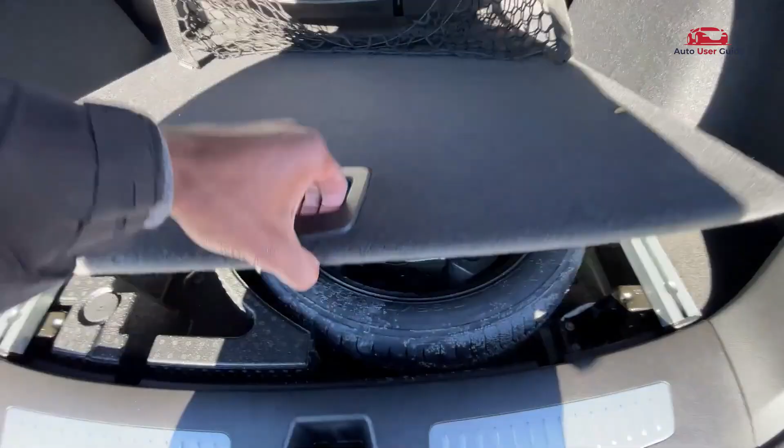Engine Compartment Fuse Box.

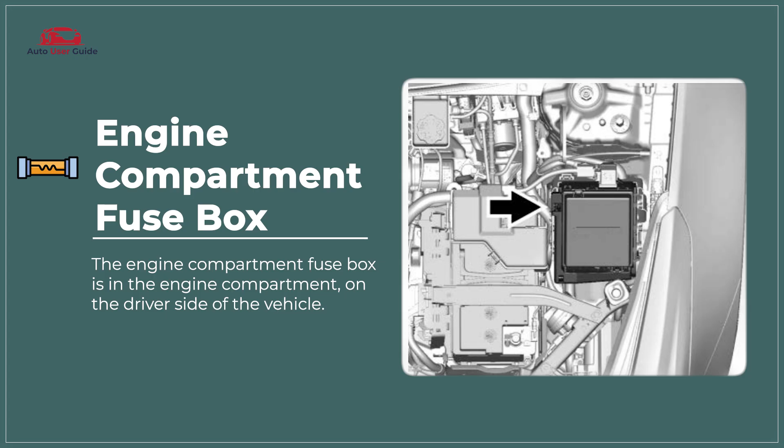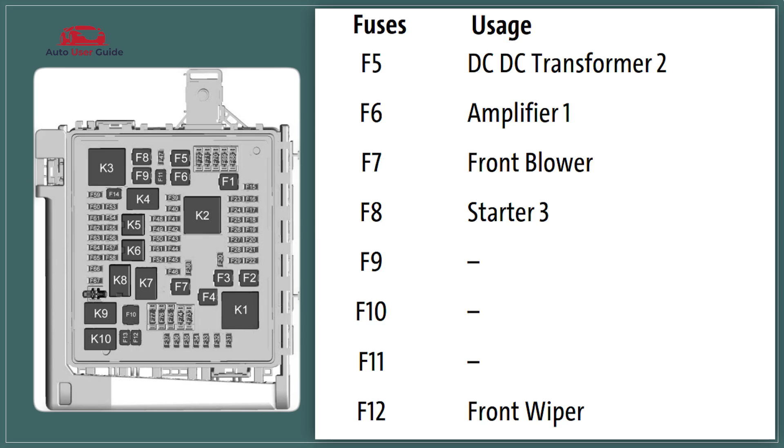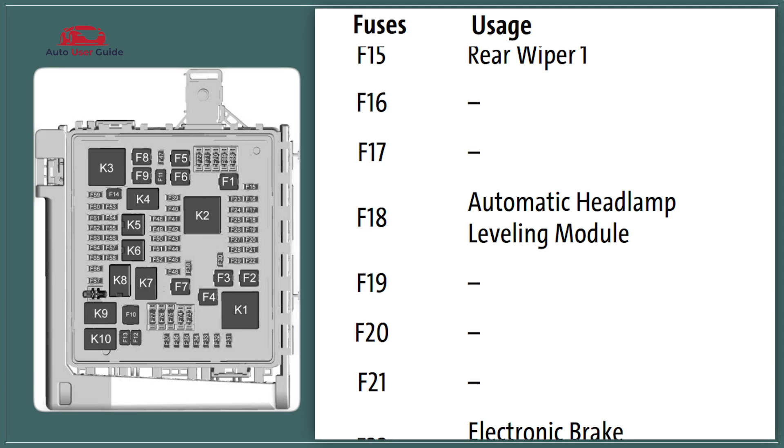The engine compartment fuse box of the 2026 Cadillac XT5 is designed as a central power distribution hub that manages and protects the vehicle's critical electrical systems. It houses a combination of fuses and relays that safeguard components such as the engine control module, cooling fans, fuel system, headlights, and various sensors. Built for modern automotive demands, it ensures stable power flow while instantly interrupting circuits during overloads or short circuits to prevent electrical damage or fire hazards.

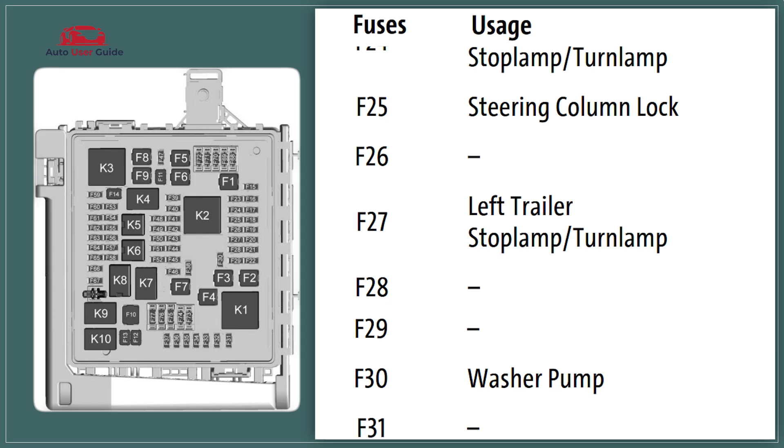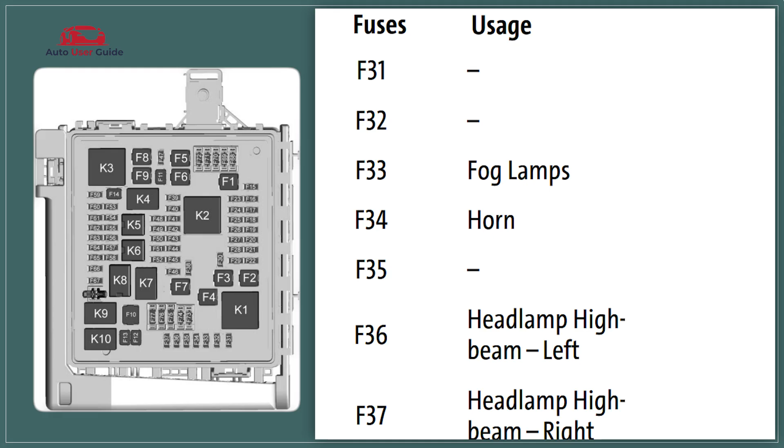This fuse box is typically engineered with a compact, weather-resistant housing that protects internal components from heat, dust, and moisture inside the engine bay. It features clearly labeled circuits for easier identification during diagnostics or maintenance, reducing service time and complexity. In many modern Cadillac designs, the system also supports advanced electronic monitoring, allowing technicians to quickly trace faults using onboard diagnostics. Its accessible layout ensures safer servicing while maintaining a high level of reliability for the vehicle's overall electrical performance.

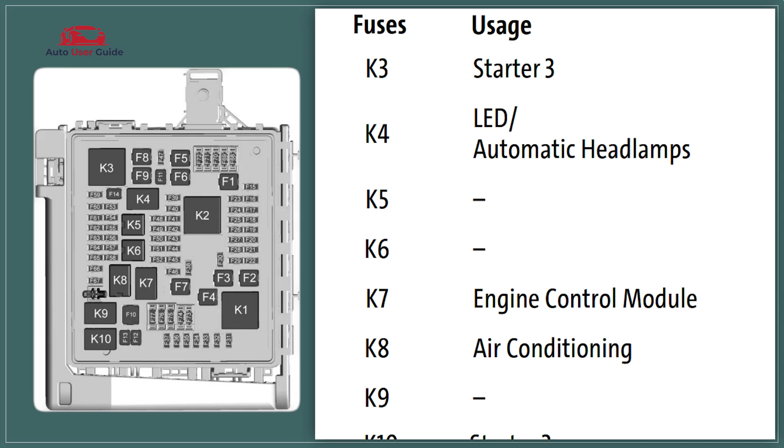Instrument Panel Fuse Box.

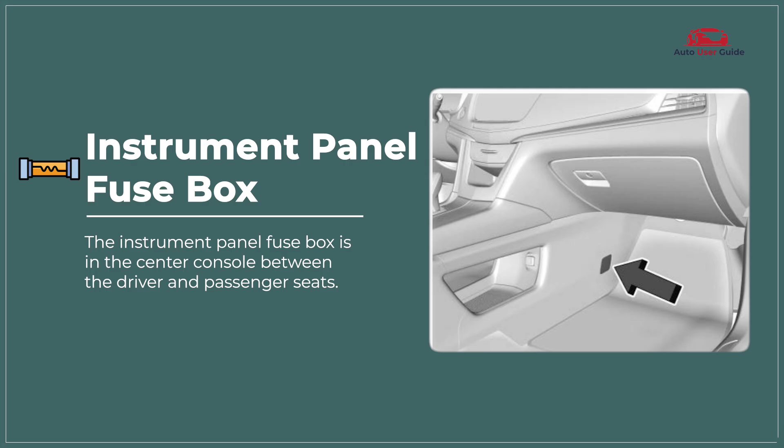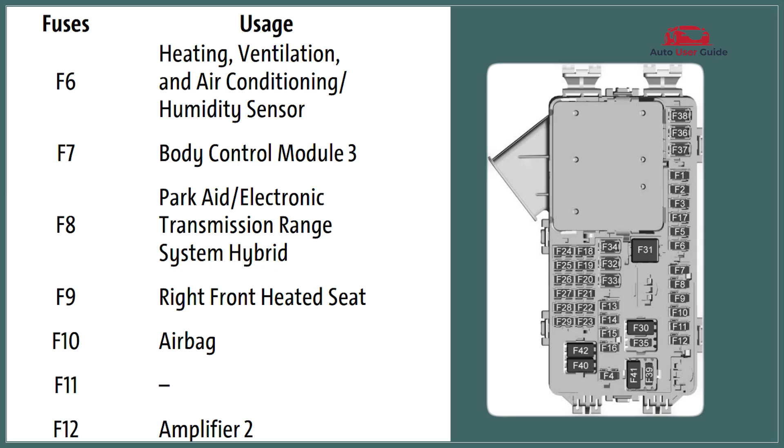The instrument panel fuse box of the 2026 Cadillac XT5 is an essential interior electrical control unit that manages and protects many of the vehicle's cabin-related and low-voltage systems. It typically handles circuits for features such as the infotainment system, dashboard displays, interior lighting, power windows, climate control interfaces, audio system, and various driver assistance modules.

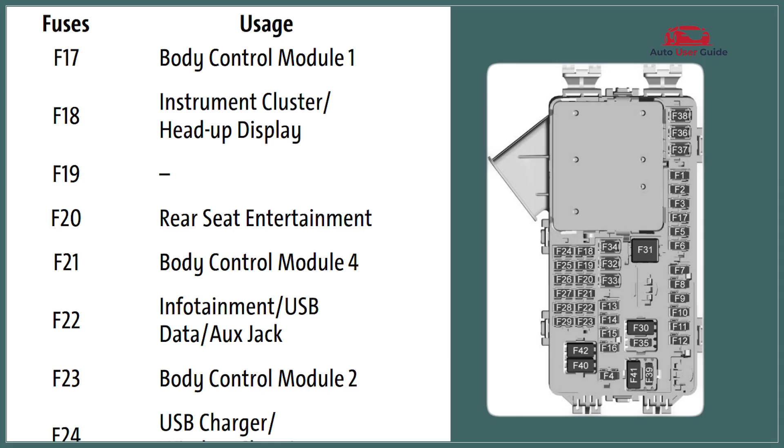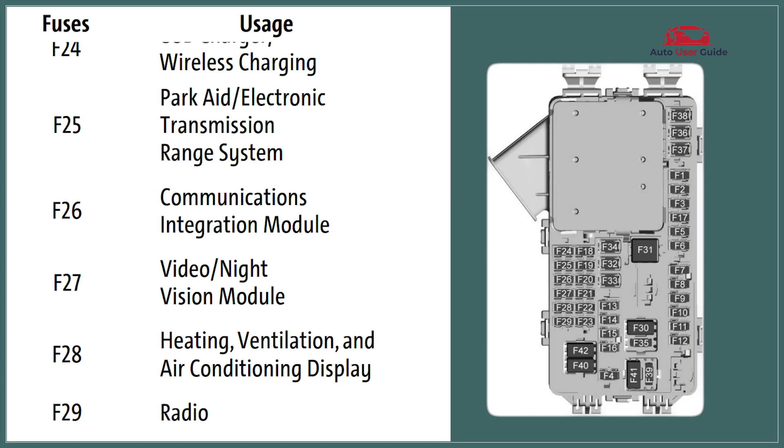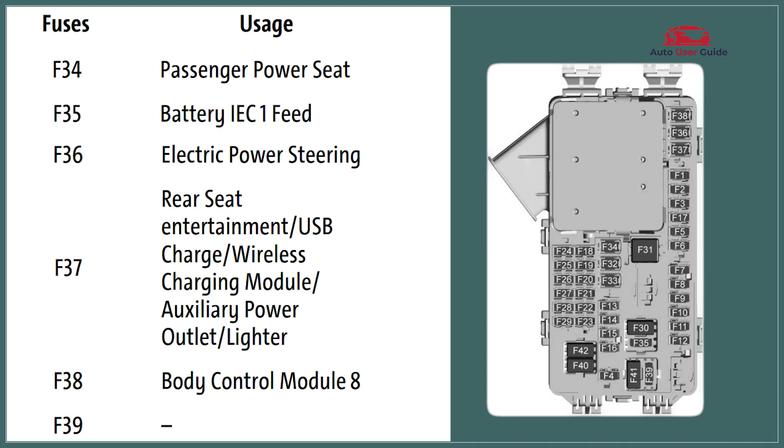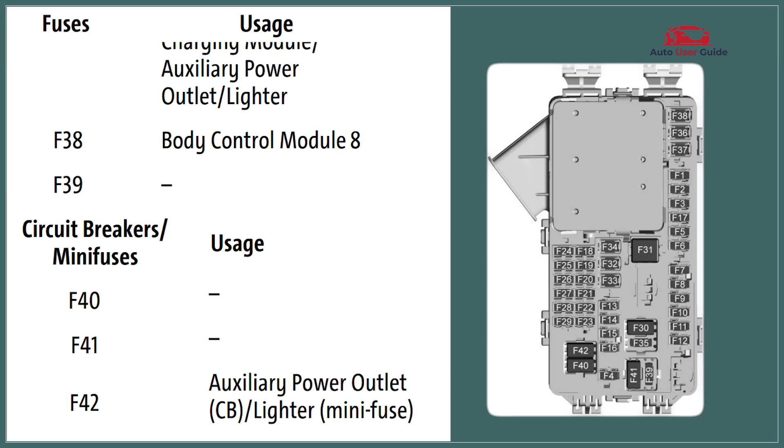Rear compartment fuse box.

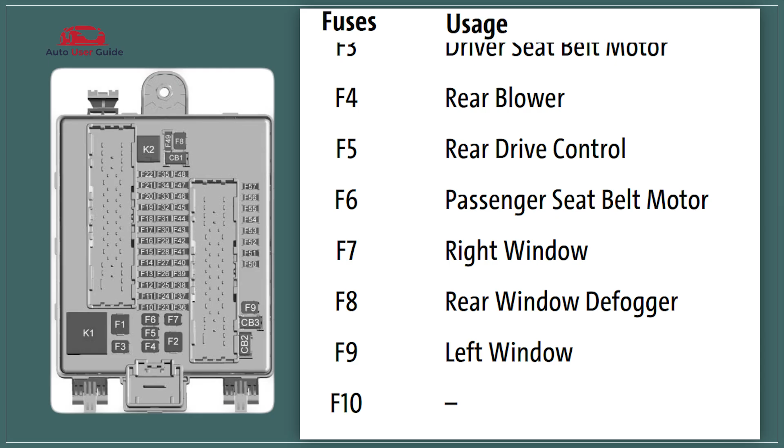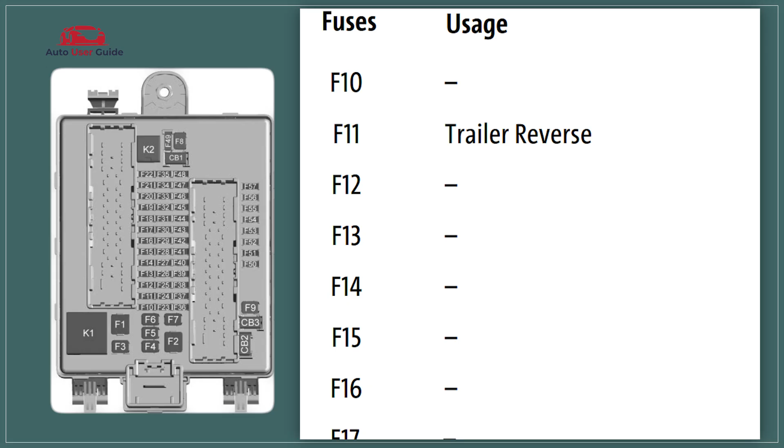The rear compartment fuse box of the 2026 Cadillac XT5 serves as a dedicated power distribution center for the vehicle's rear-mounted and auxiliary systems. It typically manages electrical circuits for components such as the tail lights, rear cargo lighting, power liftgate, rear climate controls if equipped, rear audio or entertainment modules, parking sensors, and trailer wiring connections. By organizing and protecting these circuits, the fuse box ensures reliable operation while safeguarding against overloads, short circuits, or electrical faults in the rear of the vehicle.

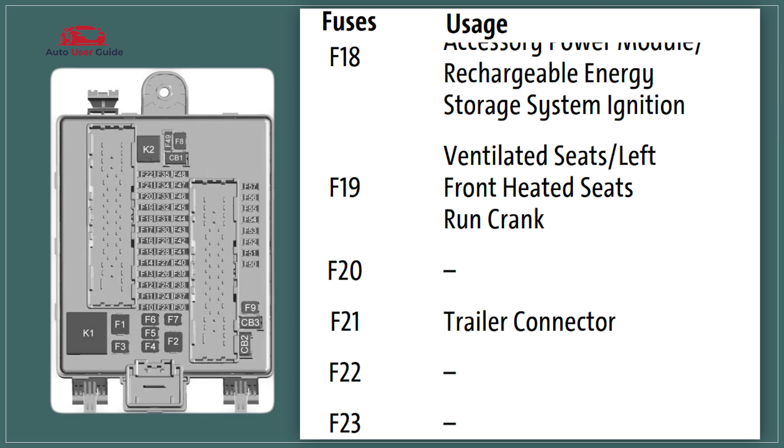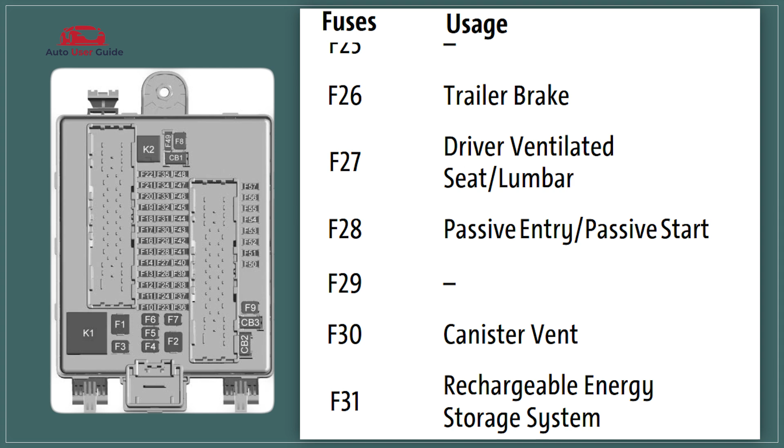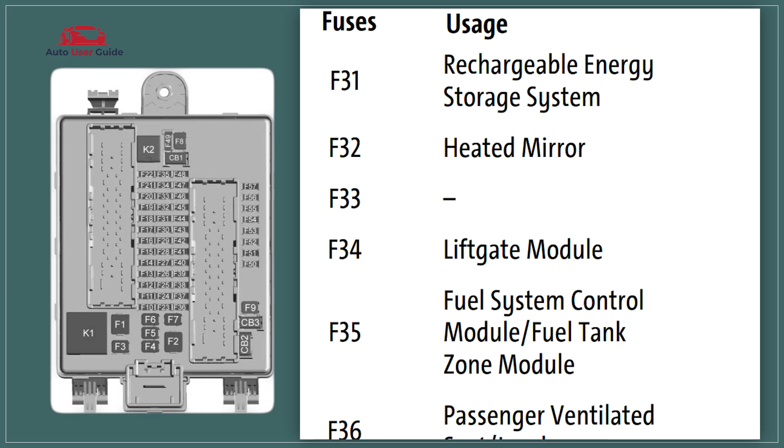Designed for convenient access in the rear cargo area, the fuse box is usually housed in a compact, protective casing that shields internal fuses and relays from moisture, dust, and vibration. Its layout includes clearly labeled slots for easy identification and replacement of fuses, simplifying diagnostics and maintenance. This design not only enhances the safety and durability of rear electrical systems, but also supports the modern functionality and versatility expected from the 2026 Cadillac XT5.

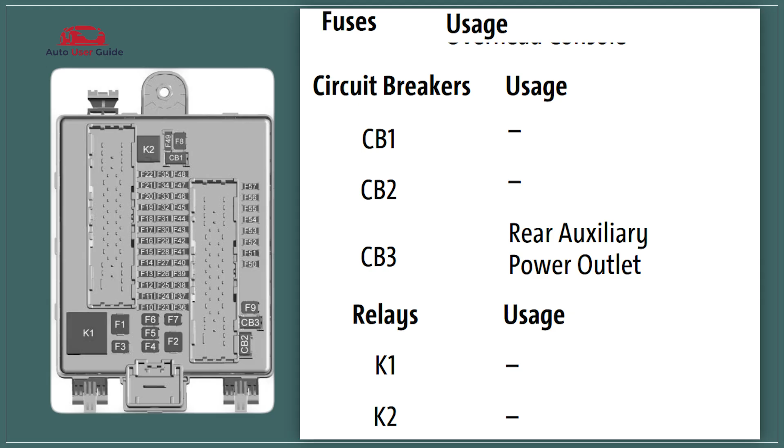Types of fuses: blade fuse, standard blade fuse, mini blade fuse, maxi blade fuse, micro 2 fuse, micro 3 fuse, J-case fuse.

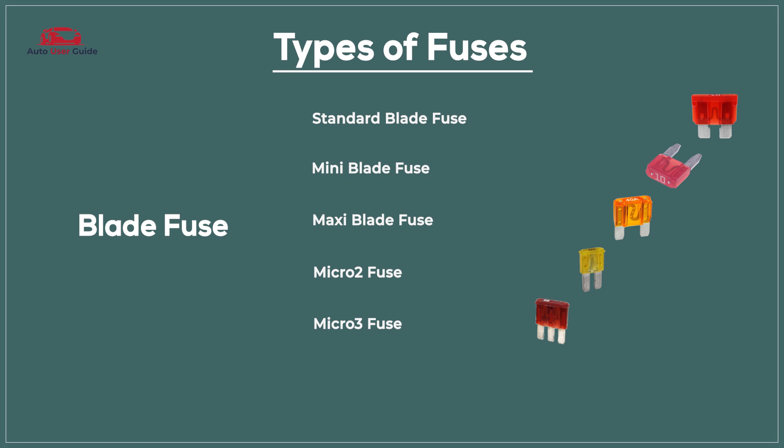Glass tube fuse, AGC fuse, SFE fuse.

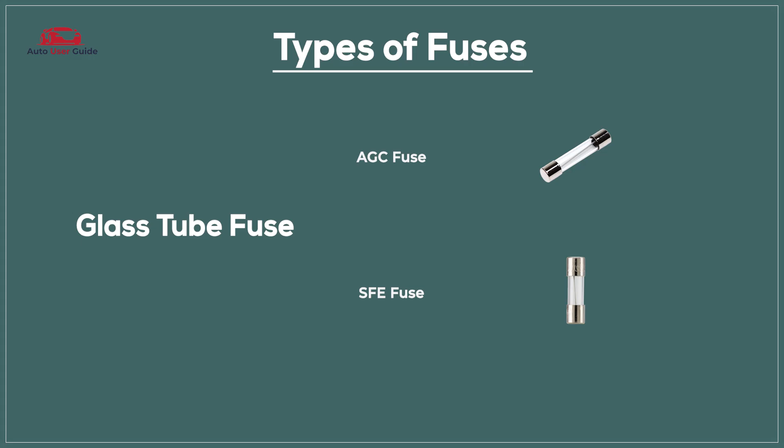Ceramic fuse, Bosch fuse, DIN fuse.

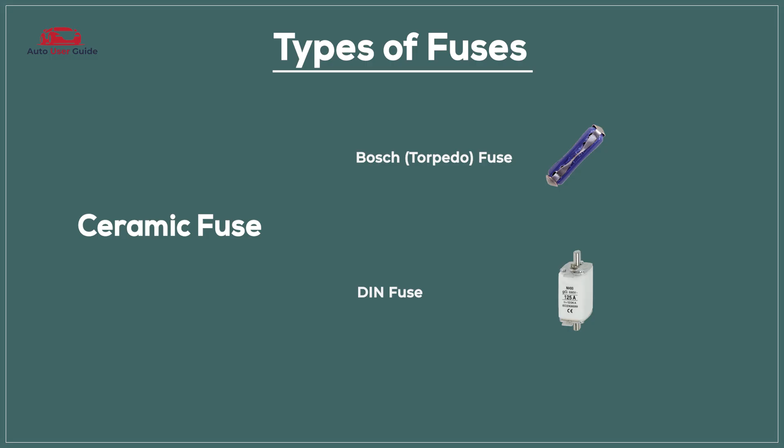PAL fuse, low profile PAL fuse, standard PAL fuse, link fuse, mega fuse, high amperage link fuse.

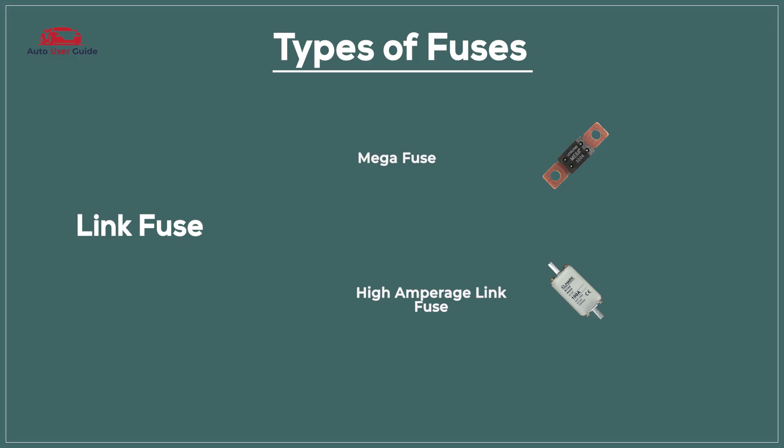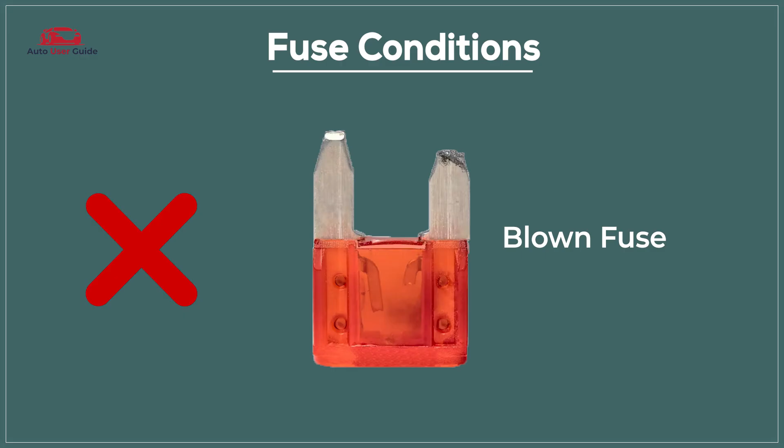Fuse conditions. Blown fuse: a blown fuse means it's no longer functioning and needs replacement, while a perfect fuse is in good working condition and performing as expected.